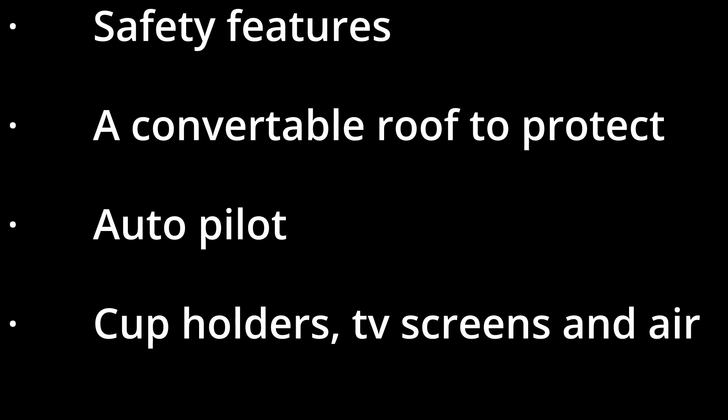The ZASU should also be able to transport an adult for a period of at least 3 hours. This can only be achieved by calculating the energy consumption of our device and conducting research to choose a suitable electric motor and battery to ensure this objective is achieved.

Another objective for our personal mobility device is for it to have a dampening system to protect the vehicle from uneven roadways. In order to meet this, it is firstly necessary to assess the ZASU's ability to absorb and dissipate vibrations and shocks while driving.

Then, after a suitable vibrational system can be selected, for instance, a shock absorber, this would allow the ZASU to absorb large amounts of shocks and vibrations when traveling on rough roadways where there are potholes.

Another objective for our design is for it to operate with decreased harmful emissions as compared to traditional motors. The design will be more ecologically friendly, and greenhouse gas emissions will be significantly reduced if an electric motor was chosen instead of fuel. Utilizing electrical vehicles promotes sustainable development because they lessen pollution emissions that cause smog, respiratory ailments, and other health issues.

Lastly, the affordability of the ZASU to be purchased by the consumer is probably one of our primary objectives, in that we want it to be as low as possible.

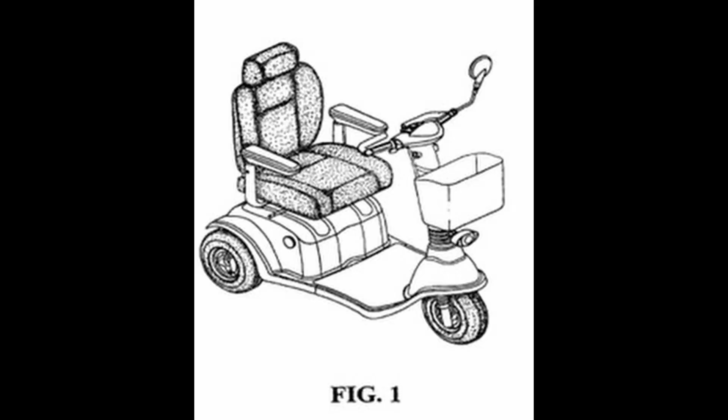Let us review the literature collected by our research team. Regarding the aesthetic appearance, these are the patterns which influence the design and form of concept A, B, C, and D. Advanced maneuverability will be achieved through the use of a tilt steering mechanism which allows the vehicle to turn on a conic angle, reducing the radius of curvature of the turn path.

In order to ensure safety when the vehicle is locked and the implementation of a climate control system, a convertible roof mechanism will be implemented to isolate the user in an enclosed environment.

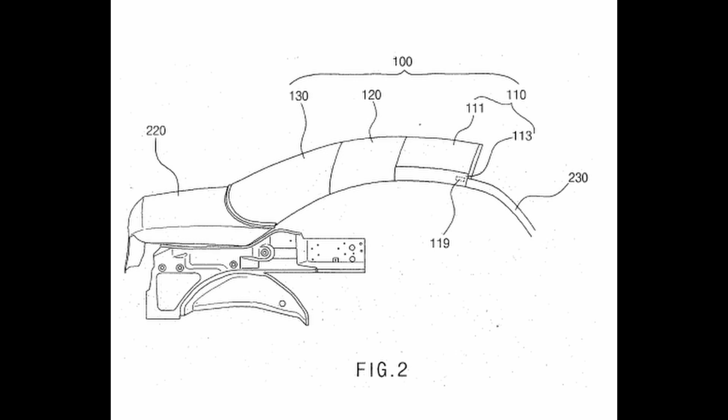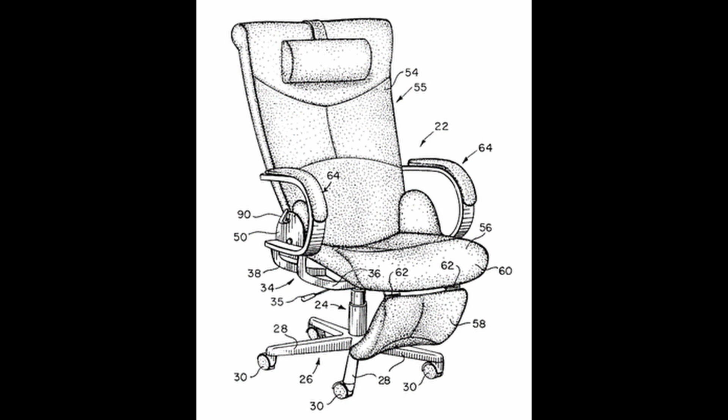The use of a reclining mechanism will be implemented on the backrest, but also to the footrest to act as a hidden storage compartment. An important point to note is that the model used for our vehicle is actually based on this chair.

And I'm here to present on the design specifications of our personal mobility device.

To begin with, our personal mobility device can be modeled in this free-body diagram. In this free-body diagram, we have the weight of the vehicle and the passenger acting at the center of gravity. Next, we have reaction forces RA and RB acting at each of the wheels. Then, we have friction μr opposing the direction of travel.

Additionally, we have the weights of the motor, the battery, and the luggage area in the diagram, along with their distances A and B from the center of gravity.

To further elaborate on the luggage area, it will be using the airport carry-on standard of 9 by 14 by 22, and it can carry up to 40 pounds. To further elaborate on our personal mobility device, this will be based on a three-wheel design and it can be compatible on the road.

The functions I will be highlighting are aspects that weighted heavily in our pairwise comparison. Firstly, safety is a huge concern. Our device has functions that prevent the vehicle from skidding when braking using an ABS system. There is also a secondary braking system in case the primary braking system fails.

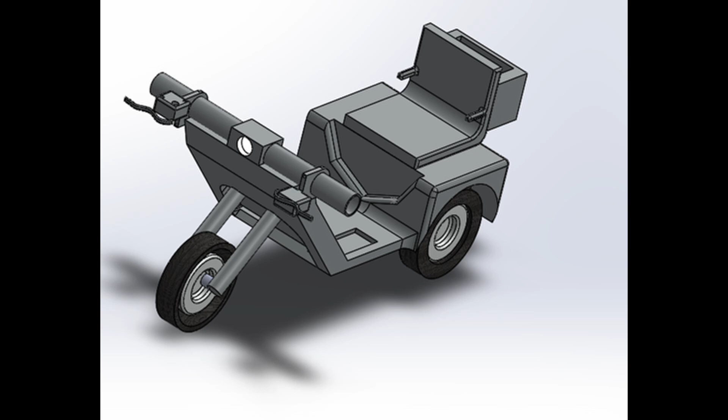The choice of frame for this design was inspired by pattern 2. This frame is constructed to provide support for drive modules while also shielding crucial components inside the model design. There is also a storage area directly behind the seat for individuals' luggage or groceries, which fulfills one of the main objectives: storage capacity.

The system includes dual AC induction motors located at the front of the vehicle. The user control interface is a simple steering wheel. The storage mechanism is a hidden underseat compartment, as seen in the literature review shown before.

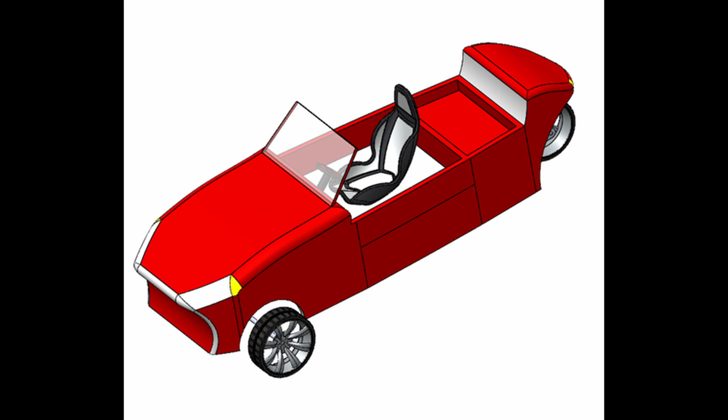Now you may see a strange compartment behind the driver's seat. That is where the convertible panels will be stored when not in use.

With respect to Design C's model and design, this was inspired by pattern number 3. Keep in mind we have a 3-wheel vehicle design with 2 rear wheels at the back and 1 in the front. Additionally, we have a front windshield supported at its sides, along with the roof further supported by 2 cylindrical poles at the back of the vehicle.

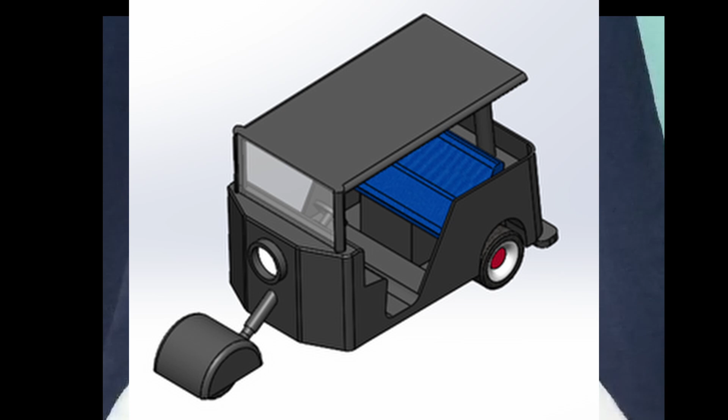This is to help protect from tropical elements such as rain and the hot temperatures of the sun. Next, we have a front light for navigation of the vehicle throughout the night, and 2 braking lights at the back to indicate the slowing down of the vehicle to others nearby.

Inside the vehicle, you can find a seat made of a very soft fabric that will ensure the user is comfortable during operation. Under the seat, there's an area where you can store your luggage, up to 40 pounds. Additionally, the steering wheel is located at the front center of the vehicle to help turn the front wheel left or right.

Internally, at the front of the vehicle, there is a battery and an electrical motor. The motor will convert this electrical energy from the battery into mechanical rotational energy, which will be provided at the rear wheels at the back.

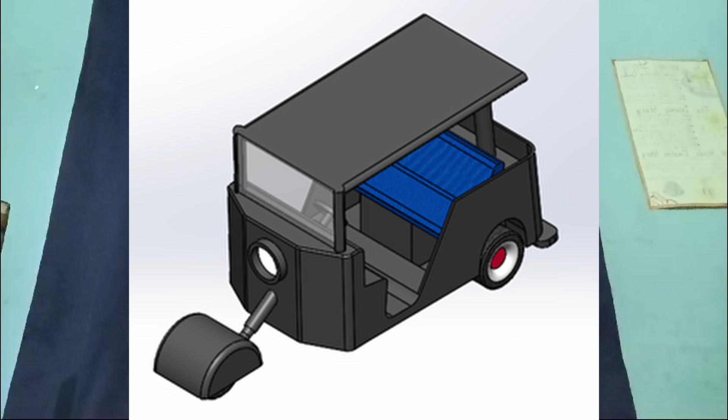Additionally, we'll be adding a dampening system at each of the wheels to remove any unwanted vibrations when encountering uneven terrain. Lastly, disc brakes will be provided to ensure a smooth reduction in speed with the vehicle.

Design D is a recumbent trike. It is the embodiment of lightweight, fast, and agile design. Design D uses an electric in-hub motor in its rear wheel as its means of mobility. There is a battery stored underneath the seat that will power this motor, as well as any other accessories.

The speed of this device will be controlled via 2 pedals in front. The left will be the brake and reverse, and the right will be the throttle. Design D uses lean controls to turn the device.

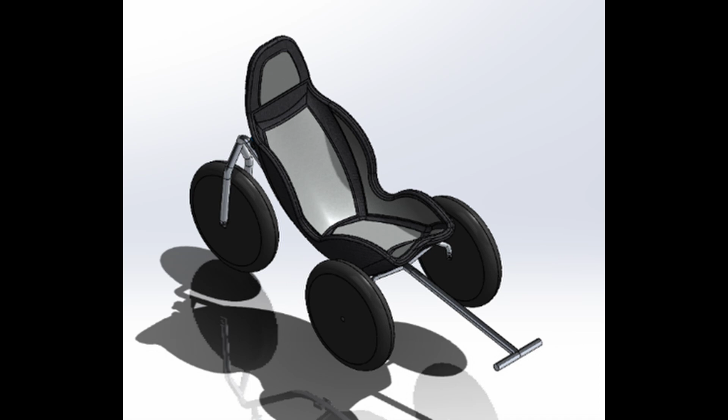This allows users to lean into corners, creating more confident and sharper corner taking. To increase storage capacity, there is a shelf that can be added at the rear of the chassis, allowing for a shelf that can hold carry-ons, bags, groceries, etc.

In order to choose which design we will move forward with, a design selection matrix was constructed. The pairwise comparison table was used to obtain the relative weighting as well as the criteria. Each design was assigned a rating from 1 to 4 without any repetition, and the cumulative scores were added up.